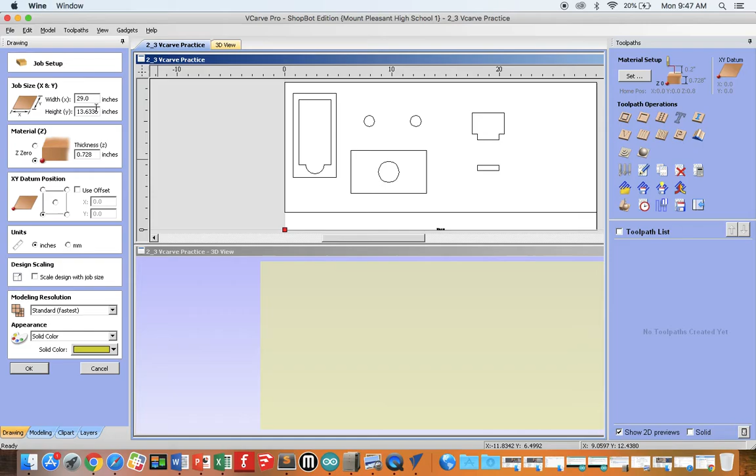Now we need to set up our job size. Your job size for X and Y will be determined by the wood you plan to take to the ShopBot. For today's practice, let's assume we used a tape measure and measured our material to be 30 inches on the X and 15 on the Y. Make sure that you deleted the old numbers and entered the new ones.

For thickness, again, we would measure the piece of wood we plan to take to the ShopBot with a caliper this time, and let's assume we measured 0.75. So our material is now set up, X, Y, and Z.

The other job setup features you have to be aware of are Z0, which should always be in this position, XY datum, which should always be in this position. Your units are inches, and you can click OK.

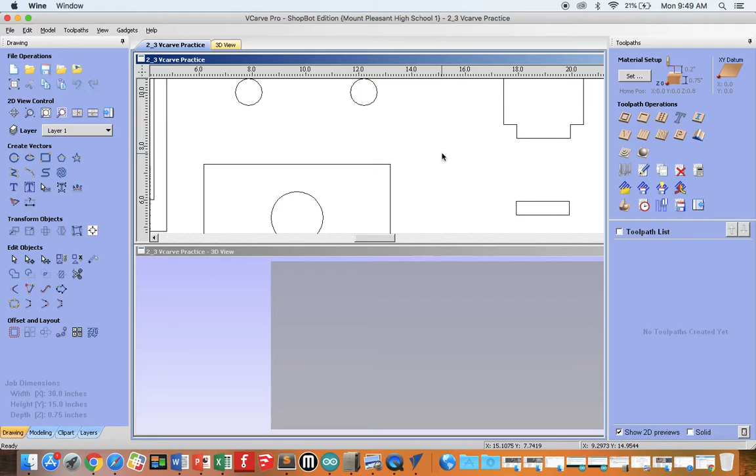Now I'm going to show you some ways to navigate your document. The first thing is knowing how to zoom. With 2 fingers, you can slide down to zoom out, and again with 2 fingers slide up to zoom in. If you ever get lost in your document, click this button over here, zoom to fit, and it'll relocate your view. If you ever need to change your job dimensions, click this button over here and you can go back to this setup.

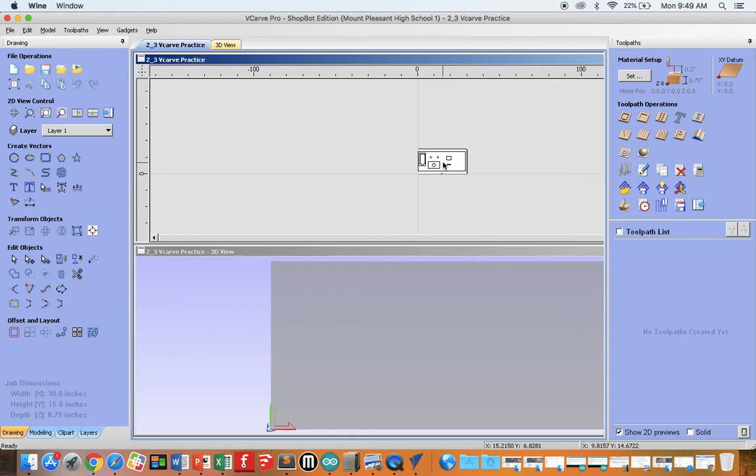Again, 2 fingers slide. I'm not clicking, I'm just lightly sliding on the trackpad. Down will zoom out. 2 fingers lightly slide up will zoom in. If you ever get lost, click zoom to fit and you'll find your document.

Next thing I want to show you is how to join your vectors. When you bring the file in from Onshape, notice I can click on a line, yet this whole rectangle is not selected. If I were to go and try and move that rectangle, only that one line moves. That's not what we want. We have to join these vectors.

To do this, draw a box around your entire document. Everything should light up pink. Come down here under Edit Objects and you'll see Join Open Vectors.

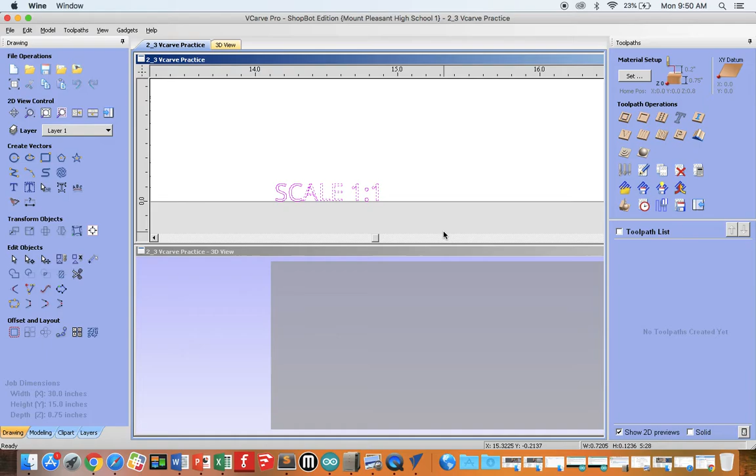I forgot to delete something before doing that. So I'm zooming in on this text. I drew a box around it. 2-finger click, delete. Now we can go in and join our vectors.

I mentioned zooming earlier. You can also do what's called pan. To do that, click Control. So hold Control down on your keyboard, and with 2 fingers this time, click with 2 fingers and move your fingers around the trackpad while you're clicking. That will allow you to pan.

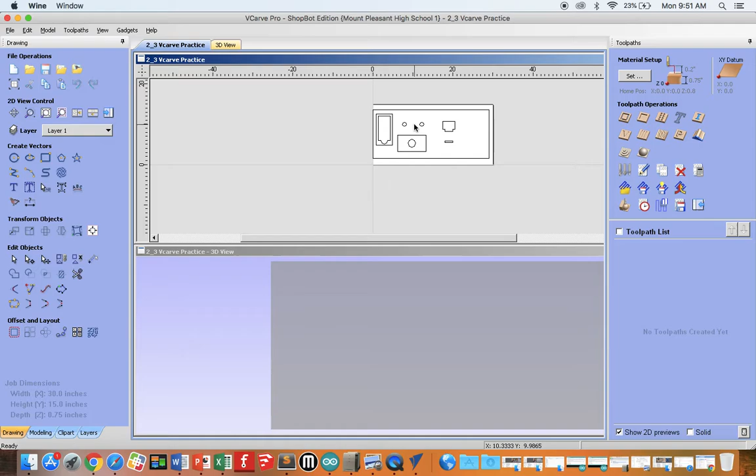Let's try to join our vectors again. So now I'm going to drag a box around all my vectors. Remember, I messed up last time. I had to get rid of that text. Now I can go to Join Vectors,

and you see closed vectors. I only have 3. Those would be the circles. They're all considered closed vectors. But I have 30 open vectors. These are all these individual lines here. These are considered open vectors.

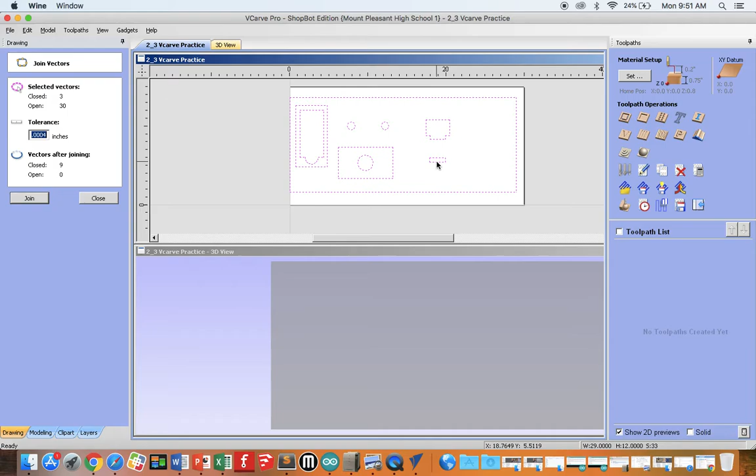In order to go to the ShopBot, we can't have any open vectors. And if you look over here, you'll see after we join these, we'll have 9 closed vectors and 0 open vectors, which is what we want.

This is a standard tolerance that shows up. Just leave it at 0.004. And when you're ready, click Join. You can close this join window. And now what you'll notice, when I click on an object, the whole thing lights up instead of just one line.

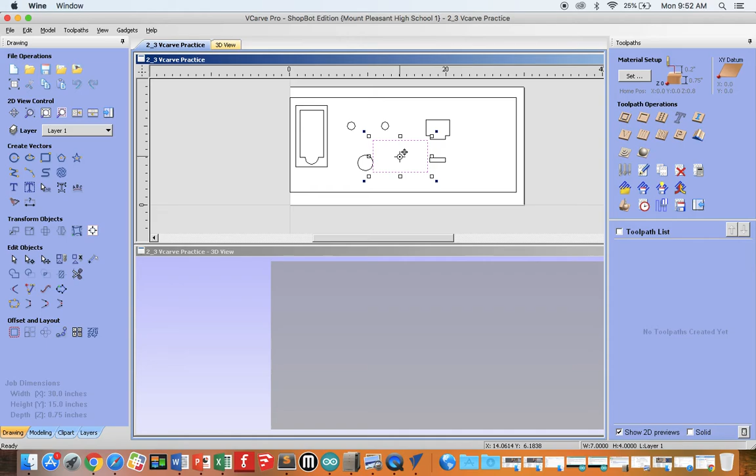I want you to now practice moving pieces around your document. I could click on this, and I could either use the arrow keys and move it over, or I could use the mouse and drag it around. But be careful. If you wanted that circle and rectangle to be together, you must join both of them, or you must move both of them at the same time.

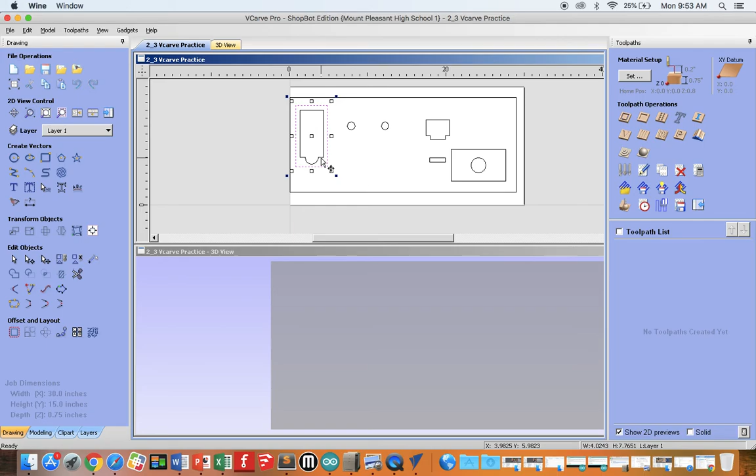In other words, I can drag a box around the two to select them, or I could click one, hold Shift, click the other, and now I have both selected, and they'll move as one shape. Again, let's show that over here. I could select one, hold Shift, select the other, let go of Shift, and now they'll move together. Or I could drag a box around two things. That's the same thing as doing a Shift select.

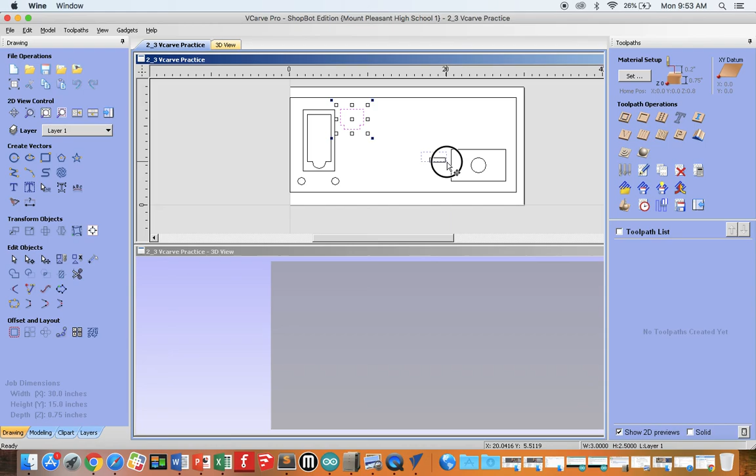So practice moving these around and reorient your shapes. At this point, you're ready for the next video, which is setting up your toolpaths.